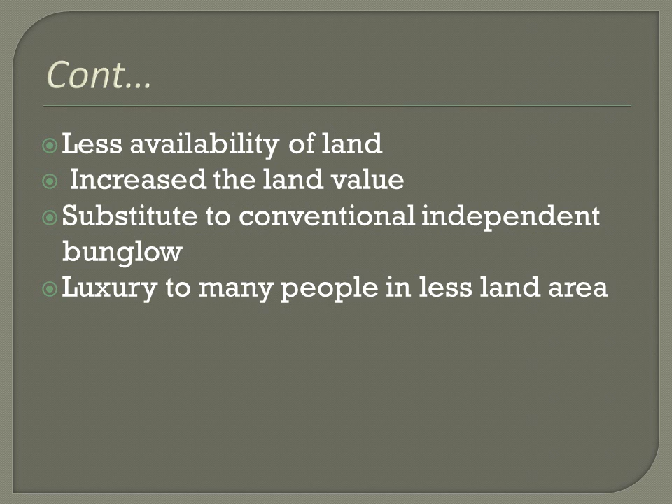Coming to the causes of high-rise buildings: less availability of land, increasing land value, substitute to the conventional independent bungalow, and luxury to many people in less land area. And coming to the foundation work.

Before going for the foundation, we have to know the importance of foundation to a structure. For most structures, including buildings, bridges, earth fills, earth and concrete dams, it is the earth that provides the ultimate support. The behavior of the ground must therefore affect the stability of the structure. The supporting ground is invariably a soil, which is weaker than any construction material like wood, concrete, steel and masonry. Hence, compared to structural members made out of these materials, a large area or mass of soil is necessarily involved in carrying the same load.

Structural foundations are substructure elements which transmit the structural loads to the earth in such a way that the supporting soil is not overstressed and does not undergo deformations that would cause excessive settlement of the structure. Hence, the properties of the supporting soil must be expected to affect the choice of type of structural foundation suitable for the structure.

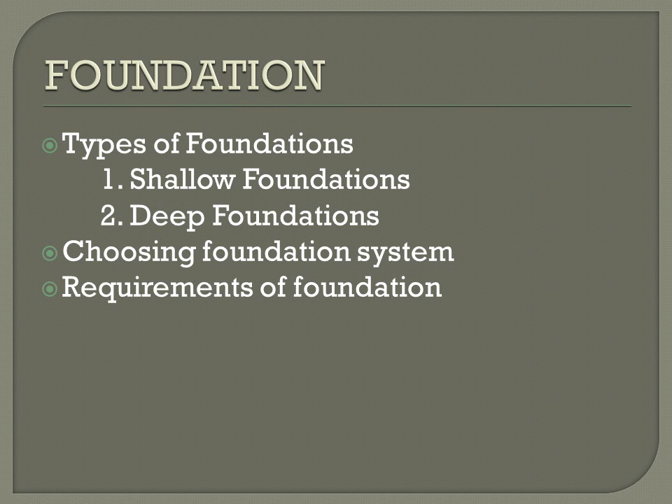Coming to the types of foundation, generally foundations can be classified into two types: shallow foundation and deep foundation. Here we can see the shallow foundation. Shallow foundations are used when surface soils are sufficiently strong and stiff to support the imposed loads. They are generally unsuitable in weak or highly compressible soils such as poorly compacted peat, recent lacustrine and alluvial deposits, etc. And the shallow foundation types.

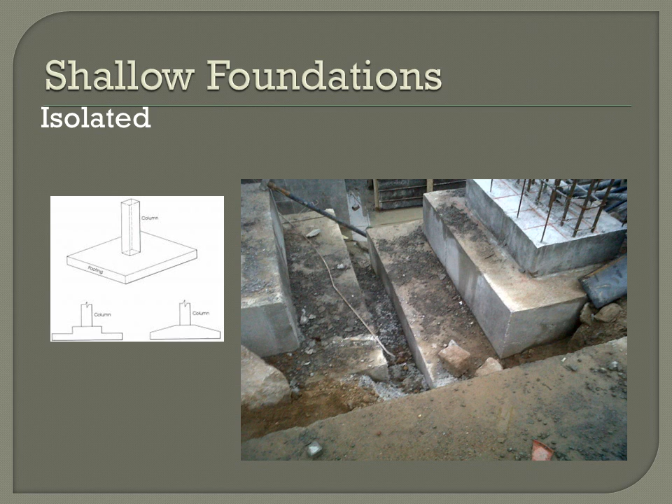First one, isolated foundation. Here we can see the isolated foundation in our site. Isolated foundation is used to support single columns only. This is one of the most economical types of footings and is used when columns are spaced at relatively long distances. Coming to the next one, combined footing.

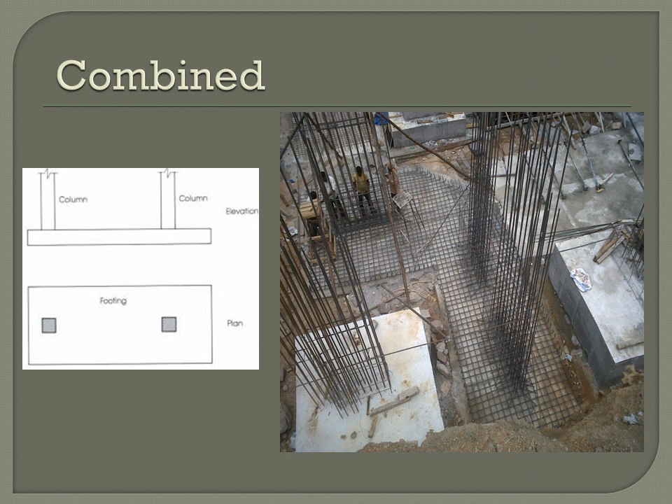It usually supports two columns, or three columns not in a row. Combined footings are used when two columns are so close that single footings cannot be used, or when a column is located at or near a property line.

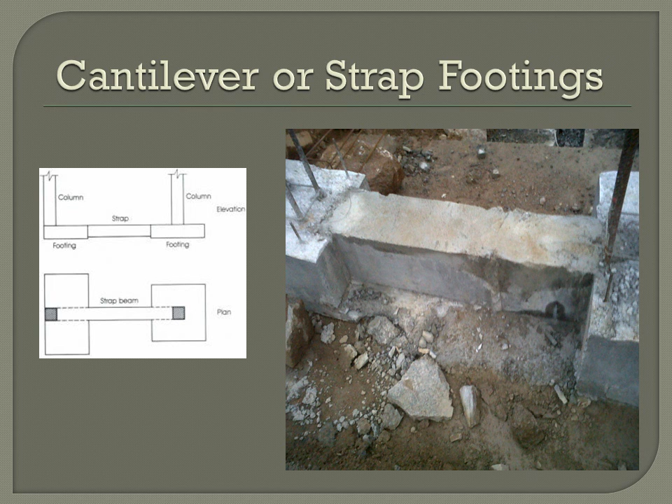Coming to the cantilever footing, here we can see the cantilever footing consists of two single footings connected with a beam or strap and supports two single columns. This type replaces a combined footing and is more economical. Coming to the next one, continuous footing supports a row of three or more columns. They have limited width and continue under all columns.

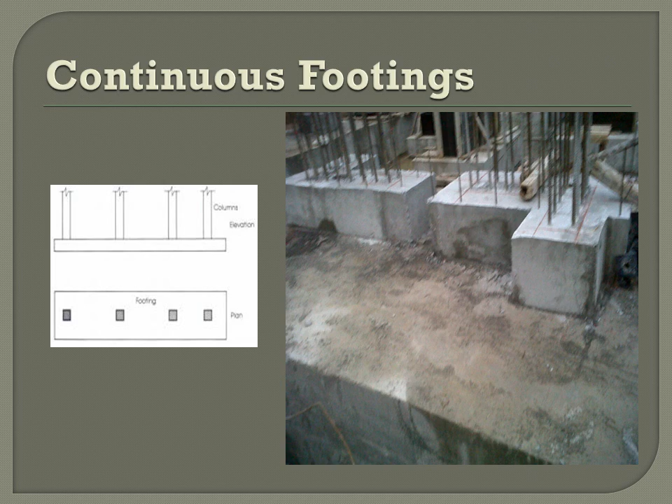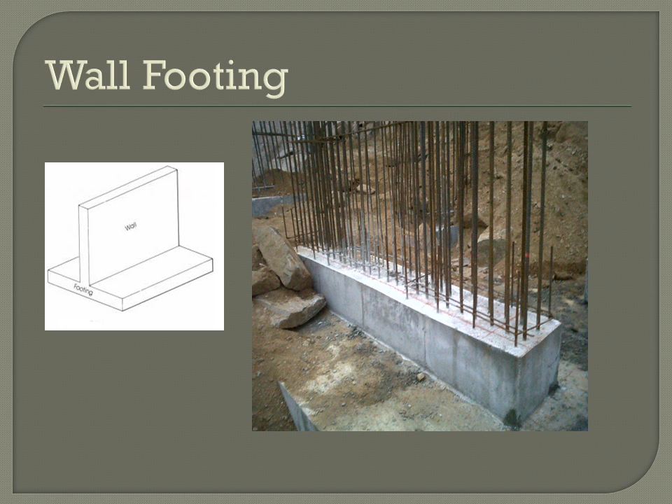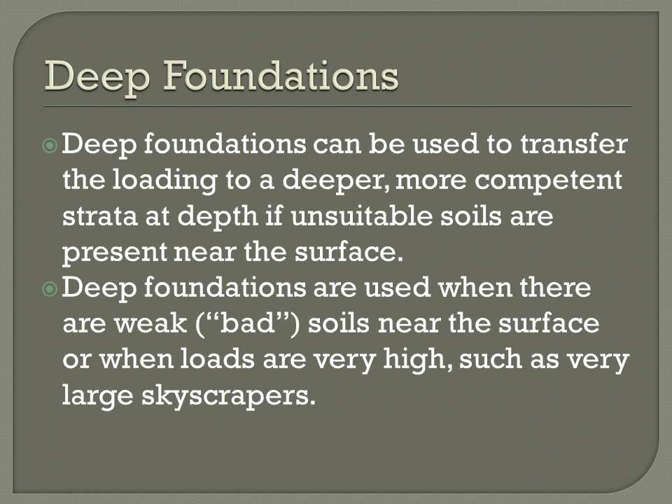And coming to the deep foundations, deep foundations can be used to transfer the loading to a deeper, more competent strata at a depth if unsuitable soils are present near the surface. Deep foundations are used when there are weak soils near the surface or when loads are very high, such as very large structures.

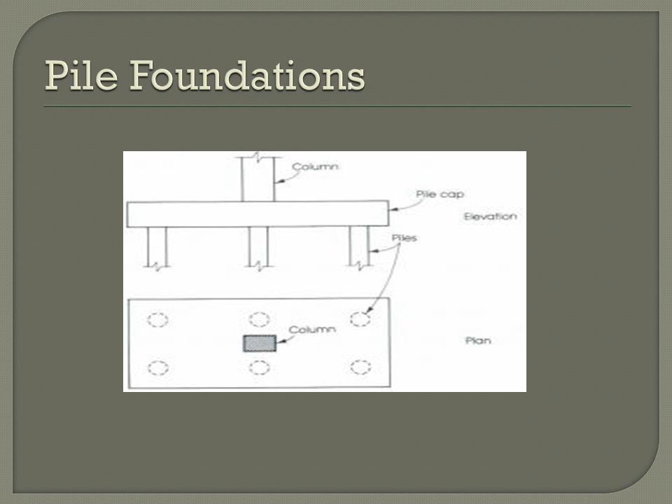And coming to deep foundations, we have the pile foundation. Here we can see the picture of the pile foundation. These are relatively long slender members that transmit foundation loads through soil strata of low bearing capacity to deeper soil or rock strata having a high bearing capacity. They are used when, for economic construction or soil condition considerations, it is desirable to transmit loads to strata beyond the practical reach of shallow foundations.

And coming to the choosing of foundation system, depending upon the type of superstructure and forces to be transmitted on the ground and subsurface conditions, we can choose the foundation system. But before choosing any foundation, we have to fulfill some of the requirements. The requirements are location and depth criteria, shear failure bearing capacity criteria, and the last one is the settlement criteria.

Coming to the location and depth criteria, a foundation must be properly located and founded at such a depth that its performance is not adversely affected by factors such as lateral expansion of the soil from beneath the foundation and seasonal volume changes caused by freezing and thawing and adjacent structures.

And coming to the bearing capacity criteria, a foundation must be safe against shear strength failure or soil rupture. An adequate factor of safety is provided to preclude bearing capacity failure, as soil rupture is commonly referred to.

And coming to the settlement criteria, it is the most considerable criteria for any type of foundation of any structure. The settlement of a foundation, especially the differential settlement, must be within the permissible limits. Excessive settlement may affect the utility of the structure, spoil the appearance of the structure, and in some cases may even cause damage to the structure.

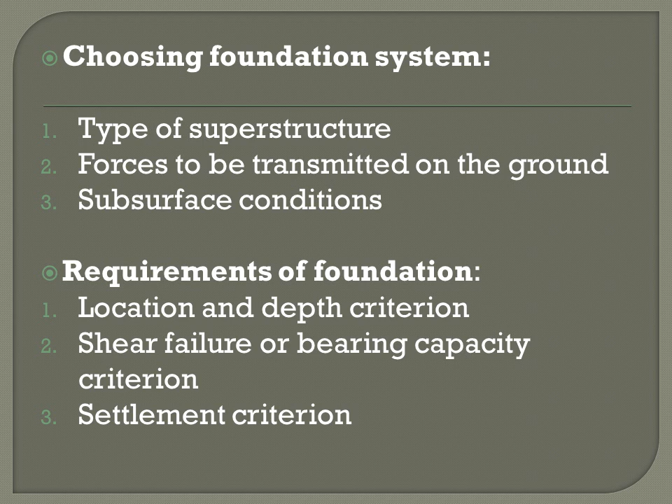And coming to the next thing, the activities involved in the foundation work, that is the excavation of the soil, P.C.C. and marking. Excavation of the soil is a preliminary activity of the construction project. It starts from the pits for the building foundations and continues up to the handing over of the project.

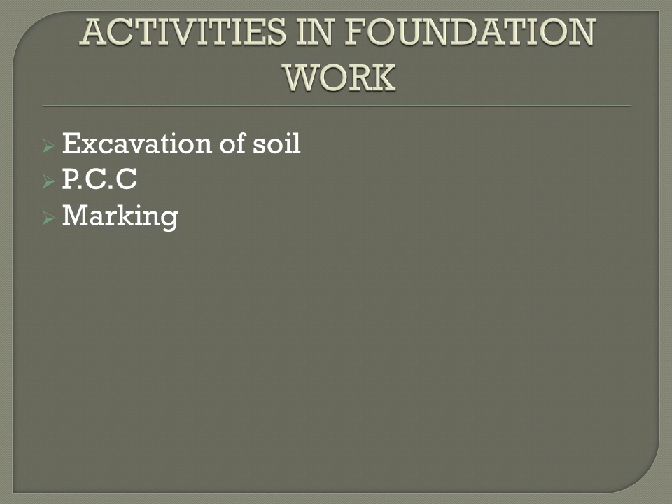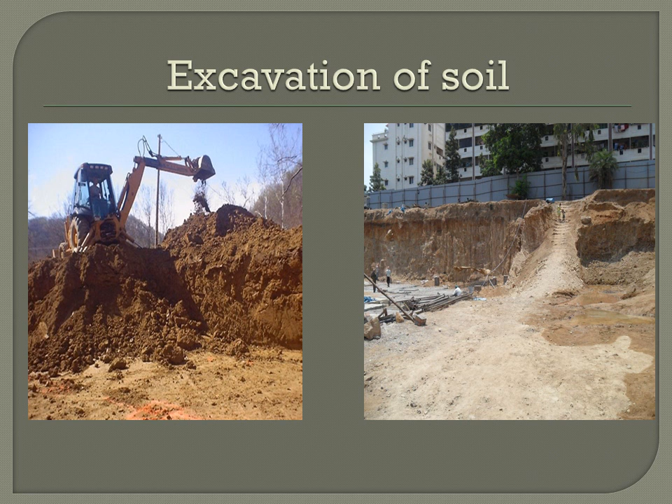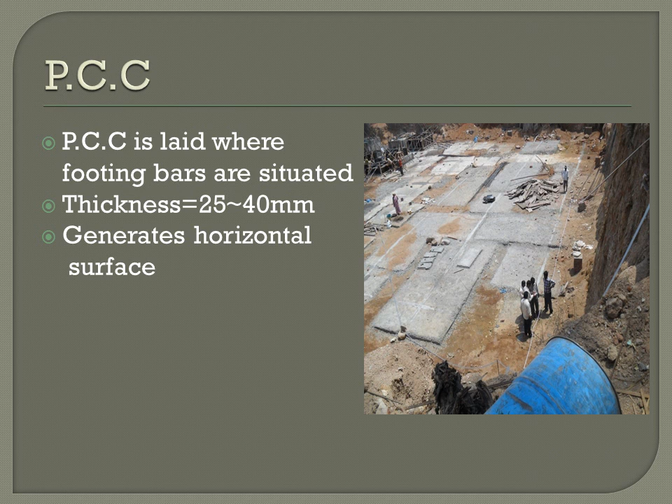And coming to the next one, P.C.C. P.C.C. is nothing but plain cement concrete. It is a construction material generally used as a binding material, and it is composed of cement and other cementitious materials such as fly ash and slag, aggregate, water and chemical additives. Here we can see the execution of the plain cement concrete at our site.

And coming to the next one, the marking. Marking plays a very vital role, a very important role, in any construction site. It is important after P.C.C., generally done with cement mortar and a benchmark for the curtailment of the bars. The marking is done in various stages of foundation work.

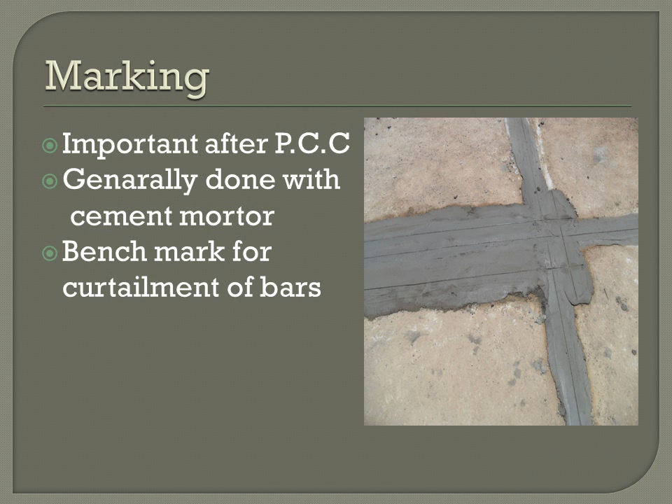And welcome to our presentation on the foundation of high-rise buildings, and team members are Yasser bin Ahmad, K. Durga Rao, Jashwant Reddy, M. Rajshekar and G. Srikanth.

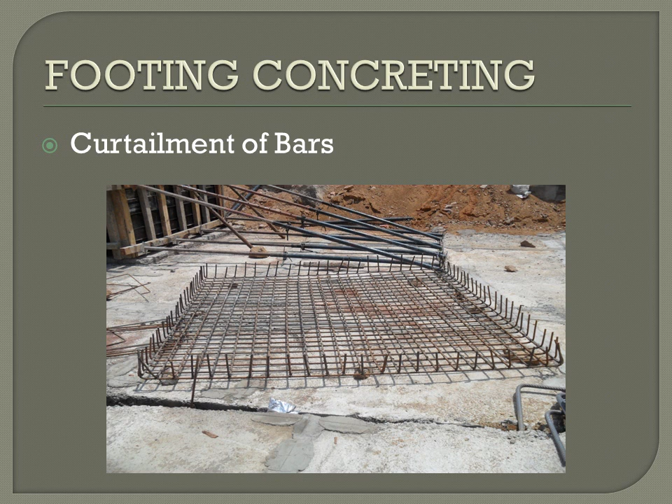And erection of the reinforcement as per design, placing of bottom reinforcement as per marking, and erection of the column reinforcement. And here we can see the column reinforcement at our site.

After erection of column reinforcement on the P.C.C., according to the design, column reinforcement is provided above the bottom reinforcement mat. Column reinforcement edges at the bottom are cut and held at 90 degrees perpendicular to vertical bars so as to provide a good grip between them.

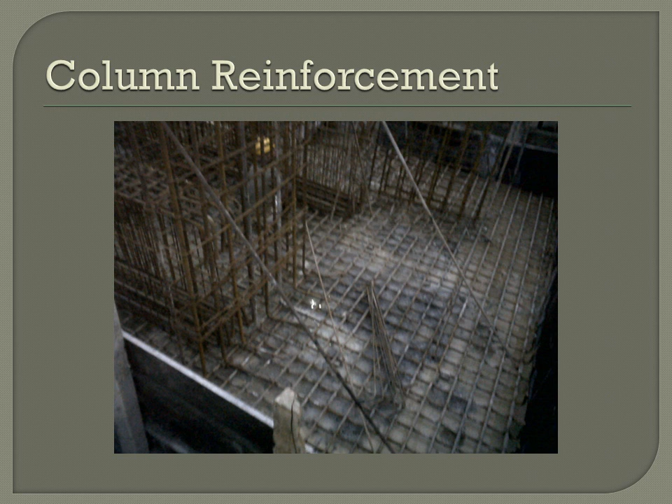If the footing has a top reinforcement mat, it is laid only after erection of the column reinforcement. Here we can see the supporting to column reinforcement. Generally, column reinforcement is provided 4 to 5 inches above the pedestal level, that is 10 to 12 inches above the P.C.C. level. Hence, due to wind or many other factors, the vertical column reinforcement may twist about a certain angle.

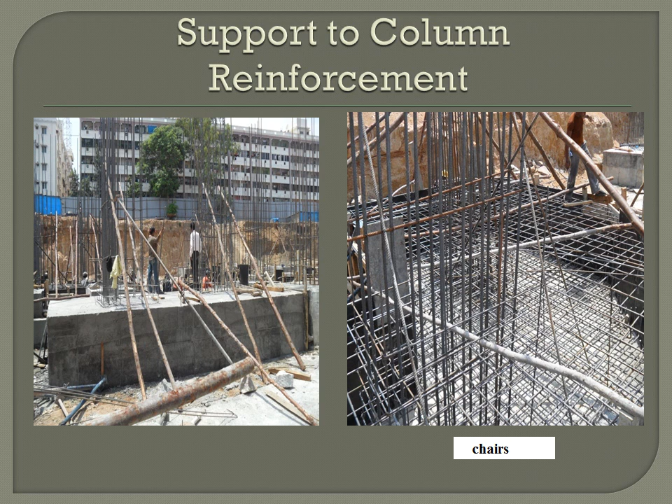So to overcome this factor, temporary supports are provided to column reinforcement using wooden flanges, steel bars connected to the beside column, or any other temporary materials. Here we can see the temporary support to the column on our site. After completion of the temporary support, the next thing is placing of concrete and compaction.

Coming to the placing of concrete, according to the mix design, concrete has to be placed after erection of the reinforcement. Based on design, the concrete mix is ordered and used. Generally, RMC ready mix concrete is used for concreting instead of manual preparation, which reduces labor work and the time taken for the process.

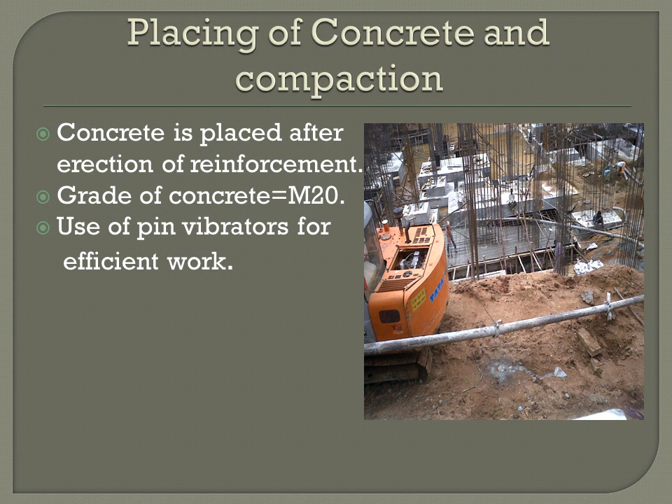With the help of connecting pipes from the RMC container to the footing, the concrete is transferred. It can be manually operated for the functioning of concreting. Usually 2 workers are required to place the concrete. Here we can see the 2 workers on our site, one to hold the concrete pipe and the other with a pin vibrator to compact the concrete. A pin vibrator of 40mm diameter is generally used to compact it.

Coming to the next elements involved in the foundation, that is nothing but the plinth beam. Here we can see the plinth beam on our site. Basically, the plinth beam connects all pillars and serves as the base for construction of walls. It's important to get the plinth beam alignment and finish perfect.

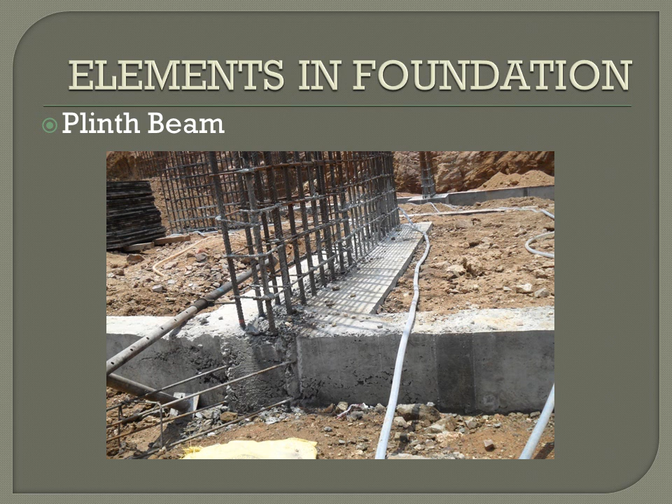Metal boards are used to mark so that the finish is good as per the measurements. The plinth beam, being the base, can mess up the wall construction later on if not done properly. So it's important to keep the plinth beam secure. They have to be strong since all the weight of the house is on the plinth beam, supported by the pillars.

And coming to the next element involved in our project, that is nothing but the pedestal. When structural works are connected to the foundation, pedestals are normally designed to carry loads from columns through the ground surface to the footings, which are located below the ground surface.

With the installation of pedestals, it is the pedestals instead of columns which come in contact with the soil. The purpose of providing pedestals is to avoid direct contact of columns with soil, which may cause possible erosion of reinforcement by soil. The soil around the pedestal should be properly compacted to provide sufficient lateral resistance to prevent buckling of the pedestal. Here we can see the pedestal on our site.

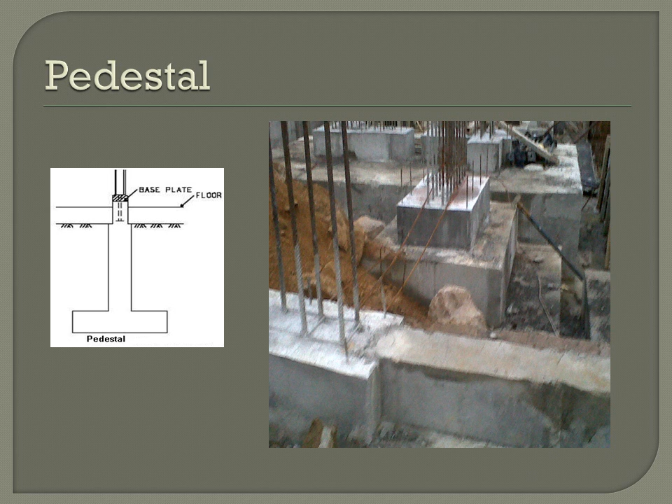Coming to the next one is the conclusion, what we conclude from our site. By experiencing visually the ongoing work at our site, it helped us to match the book knowledge with the practical application of the studies. As said, our site had 5 blocks of 22 floors each, and all of them were at different stages of work.

We studied the foundation work at Block E, Victoria Block of Empress Towers, which helped us learn from excavation level, laying of P.C.C, to the soil filling level. We also had the privilege to learn the work of slab, which was carried out in Block D of Empress Towers. Execution work above the ground level was carried out at Block C, which reached till the 10th floor, which introduced us to superstructure work.

Basically, our project work was aimed at the foundation work of high-rise buildings, as it is the most challenging part of the execution body. We feel ourselves greatly privileged to be associated with reputed Aditya Construction Company, Jubilee Hills, Hyderabad, to complete our project successfully, and their support and encouragement throughout our project is unforgettable.

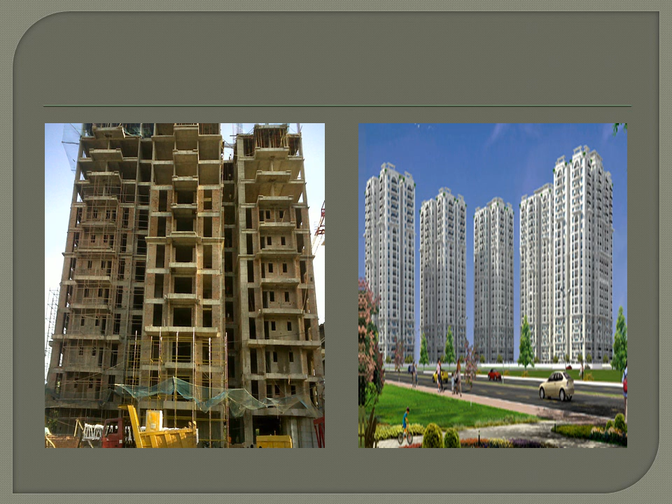And here we can see a typical picture showing high-rise buildings. And with one saying, we would like to end our session.